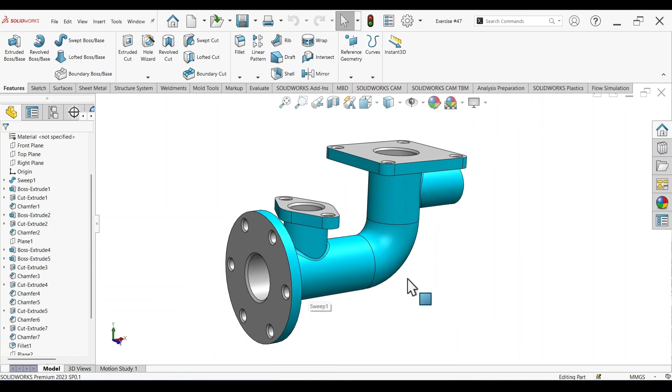Here we see the schematic drawing for exercise number 47. All dimensions are in millimeters. If we zoom in closely, we see that the unit system is set to millimeters, grams, and seconds. So that is the unit system that we're going to be using.

We have the isometric view, the trimetric view, the top view, the left view, the side view, and the section view. This section view was taken along this horizontal line. Additionally, we also have detail views showcasing the mounting holes for this circular flange, and the top square flange, and with all the dimensions given for easy implementation within SolidWorks.

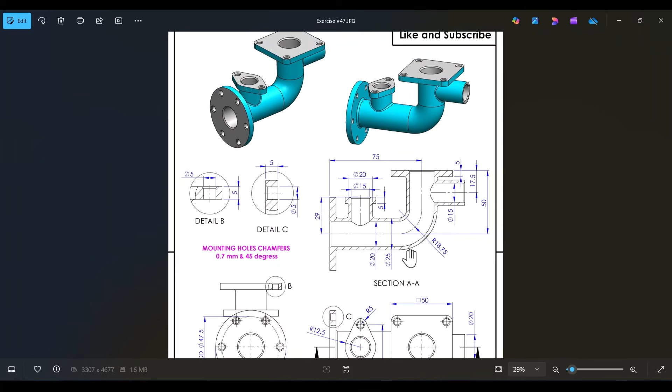It's always a good idea before we actually start the modeling process to stop and think through very carefully how we're going to model this within SolidWorks. If you've watched my videos long enough, you'll notice that I follow a feature-driven approach. What I do is look at the main features for the component, and based off of the physical features, I then think about what sort of tools I'm going to be using.

If you look closely here, we see that we have three flanges. We have this leftmost flange that is circular in nature. We have the top flange that can basically be created using a square, drawing a square on a 2D plane. And we have this oval flange, but we're going to call this the intermediate flange because it lies midway between the two large flanges that we have here.

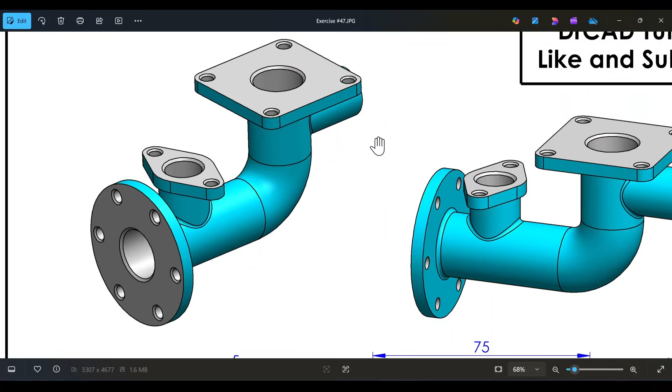So I guess the first step, if we're going to solve this within SolidWorks, is to work on creating this circular flange. For that, we're going to have to select the front plane and then sketch out a circle using the dimensions shown here. And then use the extrude boss base tool to create the thickness.

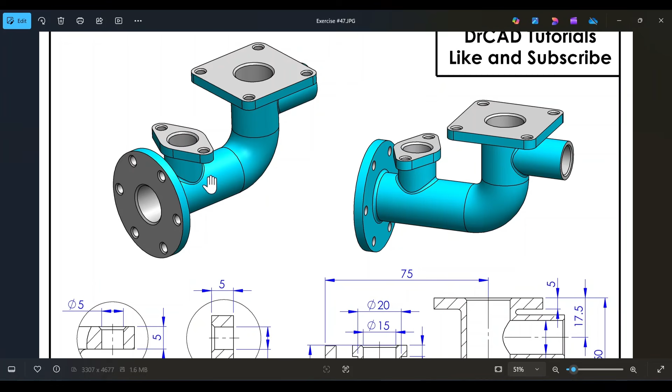After that, we're going to move on to creating the elbow SolidWorks component. What we're going to do is sketch out an annular profile, a pipe section, and then use the swept boss base tool to create the elbow, following a predetermined path. In this case, the hidden line shows the elbow path, and the elbow has a radius of 18.75 millimeters.

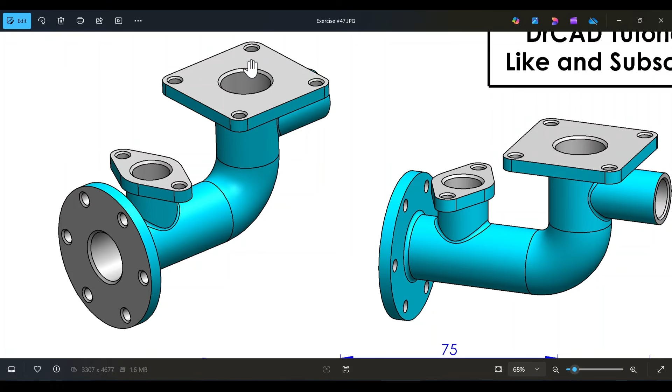After that, we're going to work on creating the top flange using the center rectangle tool and then setting the relation between two sides of this rectangle as equal, creating a perfect square. And then we're going to use the extrude tool to create a thickness.

After that, we're going to work on creating the intermediate flange. If we look at the top view, we see that we have a 2D sketch for the intermediate flange. Using the circle tool, we're going to create this 2D sketch, and then use the extrude tool again to create the connection between the elbow and the intermediate flange.

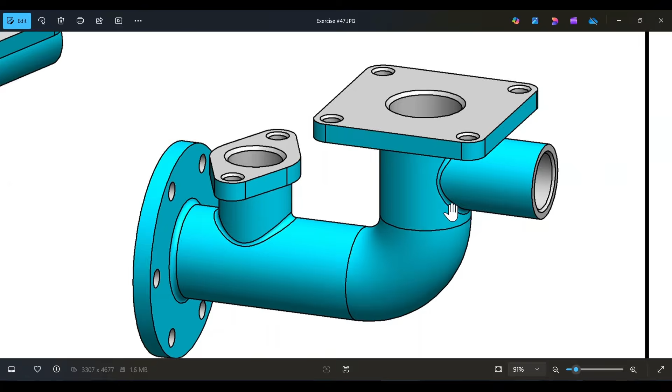Finally, if we look at the trimetric view, we see that there's a section that is basically protruding from the top of the elbow. So we're going to have to create a new drawing plane. The drawing plane in this case needs to be at a certain distance from a relative plane. After that, we're going to use the extrude tool to extrude it all the way to the surface, setting the end condition to up to surface.

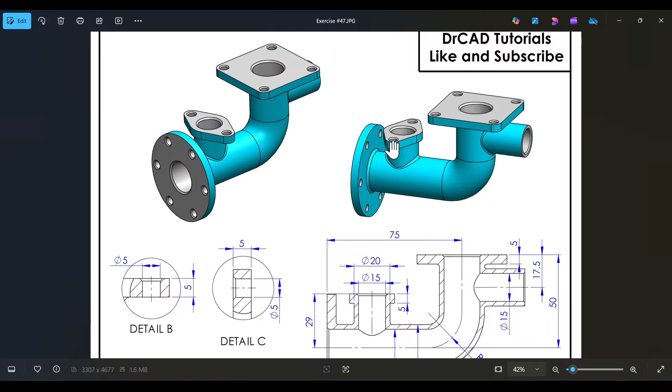Finally, we're going to use any of the fillet tools or chamfer tools to create or add the final touches for the components, and that's pretty much it. After that, we're going to assign a material; in this case, the material is alloy steel. Then finally, when everything's done, we're going to determine the mass of this part in grams. That pretty much sums up what we're going to do in this exercise.

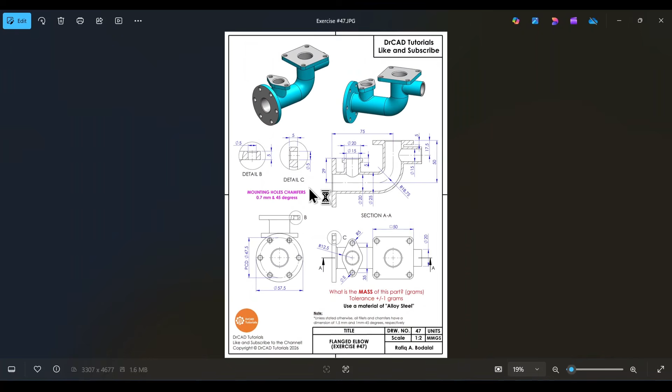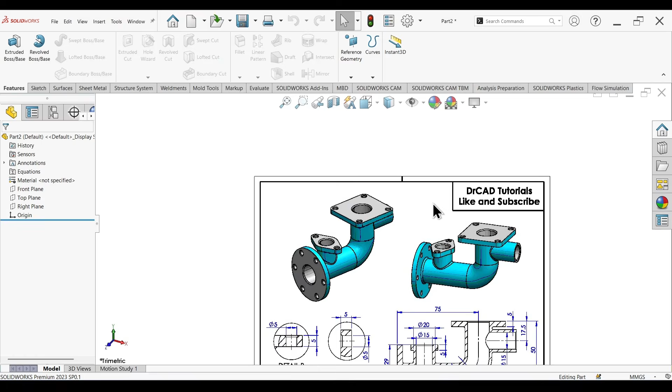Okay, so let's start by creating a new SolidWorks part. As always, let's set the background to clean white, and let's copy exercise number 47 into SolidWorks. Let's go ahead and make this smaller.

As I said previously, the first step would be for me to create this leftmost flange, the circular flange. So to start, let's select the front plane, sketch, drag this to the side, activate the circle tool, and from the origin, let's draw a circle.

Now let's activate the Smart Dimension tool, and looking at the side view, we see that the left flange has a diameter of 57.5 millimeters. So the diameter of this circle needs to be 57.5 millimeters.

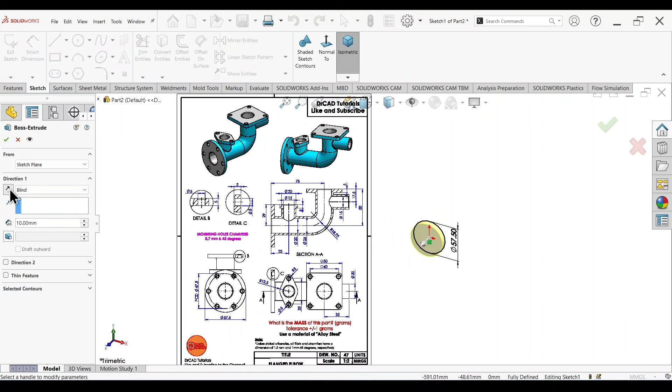All right, now press the S key, select Extrude Boss Base. We're going to reverse the extrusion direction, and we're going to set the extrusion thickness to 5 millimeters.

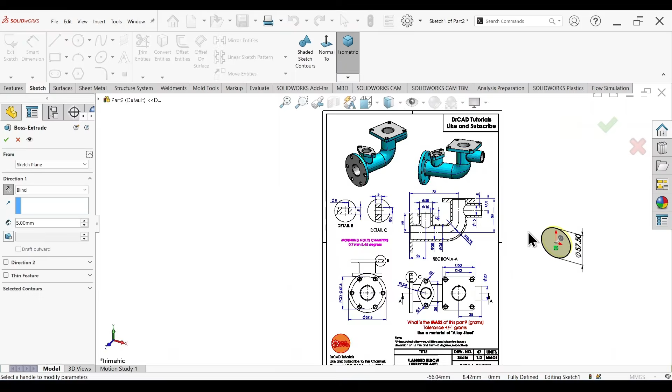How do I know that the extrusion thickness needs to be 5? Because if we look at the detail view here showcasing the mounting hole for the left flange, we see detail C has a thickness of 5 millimeters, and this thickness corresponds with the thickness of the flange. And then select OK. Now what we need to do is select this face, sketch, activate the circle tool again.

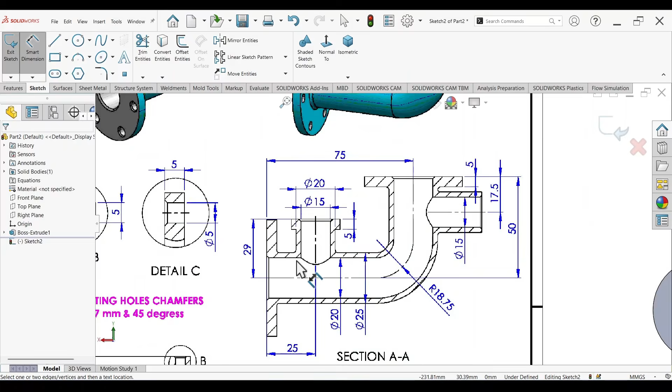Draw 2 concentric circles starting from the origin, 1 and 2. These 2 concentric circles need to be the annular section for the elbow section, or the pipe section, for this component. We see that the outer diameter needs to be 25 millimeters and the inner diameter is 20 millimeters. So the diameter of this circle is 25 and the diameter of this circle is 20 millimeters.

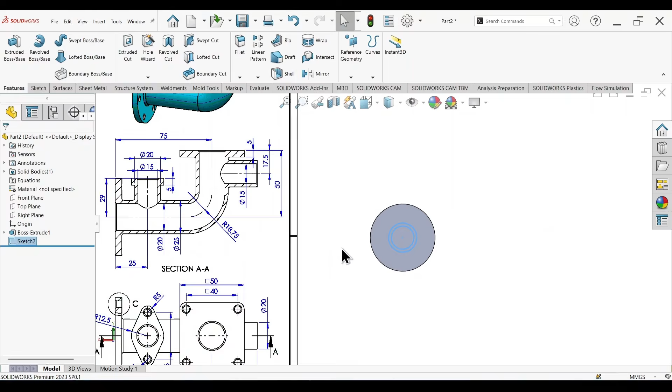So now that we have the 2D sketch, let's exit the sketch. What we need to do now, before we use the Swept Boss Base tool to create the elbow section, is sketch out the path, the extrusion path, for the piping section.

To do that, we need to select the right plane, sketch, and then select the line tool. Starting from this point right here, let's draw a horizontal line, and then a vertical line to finish it off.

Activate the Smart Dimension tool, and we can see here that the horizontal distance or the horizontal component for the line needs to have a distance of 75 millimeters. So this needs to be 75.

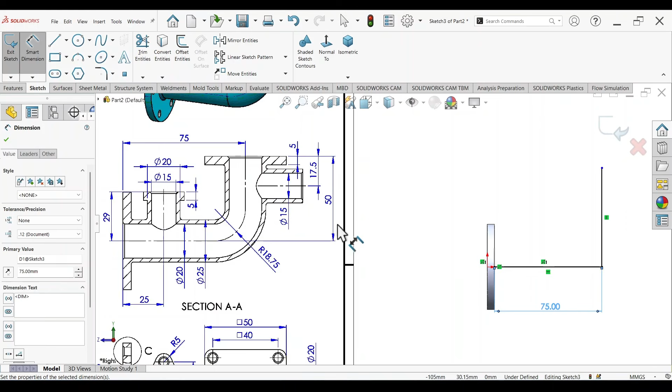Whereas the vertical component has an overall height of 50 millimeters, but please take into account that we have a flange here at the top, and the piping section doesn't go all the way to the flange. It doesn't go through to the flange, but we need to stop at this surface right here. So the distance needs to be 50 minus 5, which is 45 millimeters. So this edge needs to be 45 millimeters.

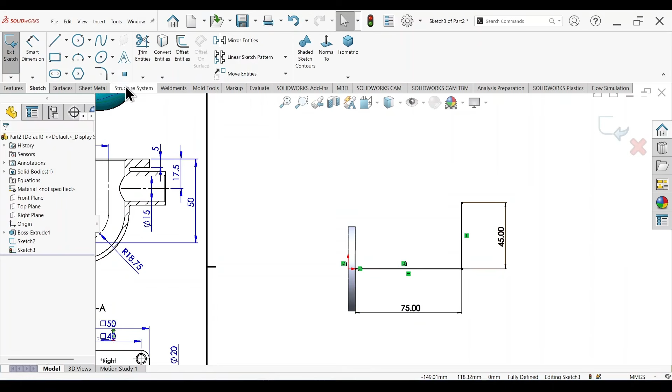Now select the fillet tool, and here we're going to define the elbow radius. In this case, it's 18.75 millimeters. And then click OK.

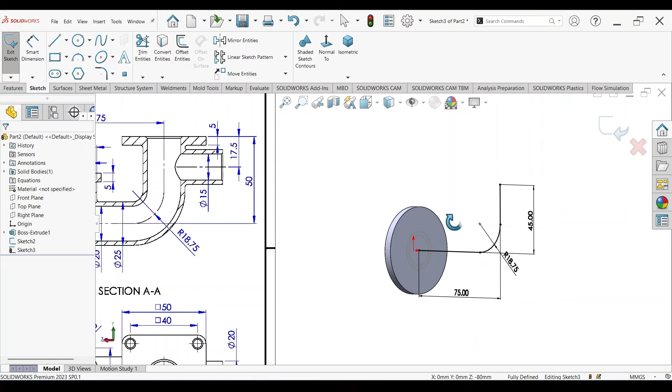Okay, so now we sketched out the extrusion path for the angular section. Exit sketch, go to features, select Swept Boss Base, and it automatically selected the last sketch we created for the sweep path. Now we just need to select these 2D sketches that we're going to extrude.

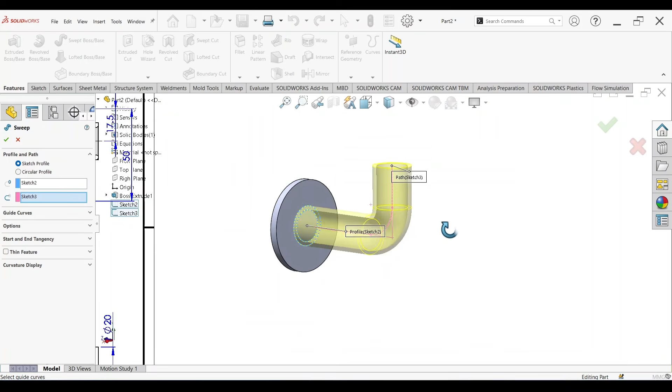So here, just select Sketch 2. We see that we have a preview for the extrusion process. Go ahead and select OK.

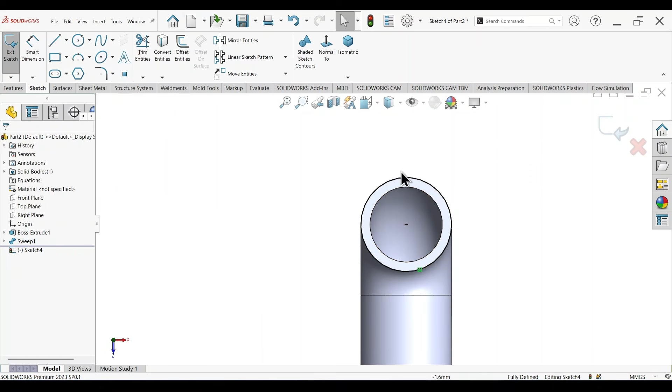All right, now we're going to work on creating this top flange, this top square flange. So select this top face, sketch, select Convert Entities, and that will wake up the center point for the circle. Activate the Center Rectangle tool, and from this point, draw a rectangle.

Click on this line while holding Control. Click on this line as well, and set the relation as equal, converting this rectangle into a perfect square.

Activate the Smart Dimension tool, and if we look at the top view for this top flange, we see that we have a dimension of 50 millimeters, and this symbol here says that it's a square. So for both sides of this rectangle, it needs to be 50 millimeters.

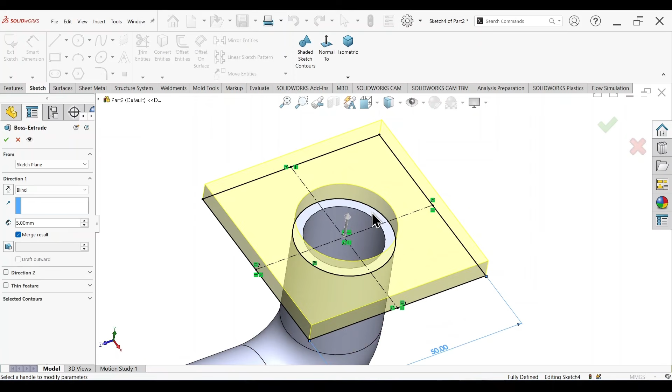All right, the sketch is now fully defined. Press the S key, select Extrude Boss Base. We're going to extrude this, adding this section right here. Let me go back to normal view and delete this line. Press the S key, Extrude Boss Base again - this is much better now. We'll set the extrusion thickness to 5 millimeters and select OK.

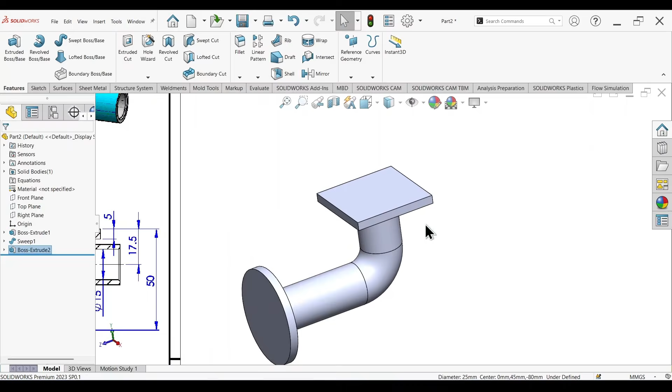And that creates the top flange. But of course, the edges for this top flange are rounded out - you can see here these edges have a fillet. How are we going to determine the dimension of this fillet?

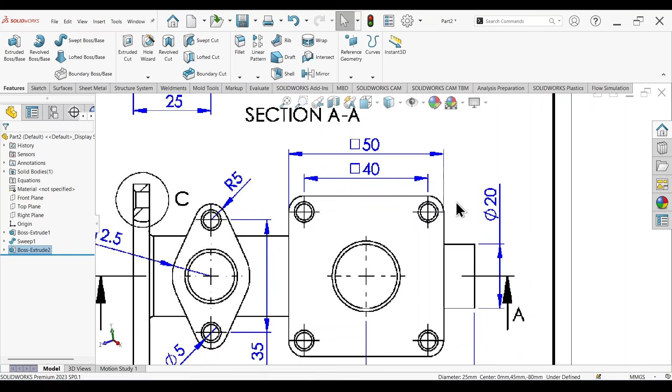If we look closely, the overall length of this edge is 50 millimeters, and the distance between these two mounting holes is 40. So 50 minus 40 is 10, divided by 2 gives the radius of curvature for this fillet - 5 millimeters. So we simply assign a fillet radius of 5 millimeters and select these 4 edges: 1, 2, 3, and 4.

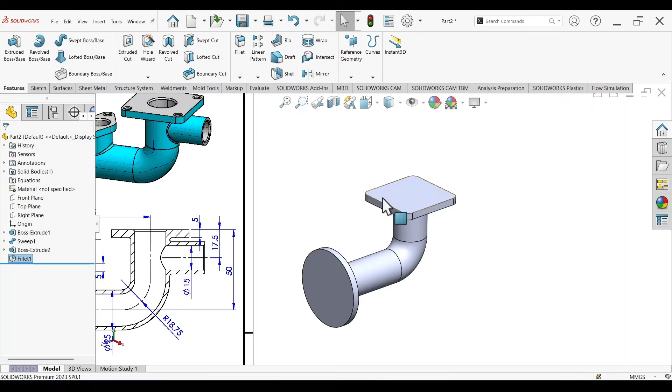Wonderful. Now we can see that the two flanges, the top flange and left flange, are closed off. We need to draw 2 circles and then extrude cut to create the opening, since the piping section is open on both ends. Let's start with this left flange - select this surface, sketch, activate the circle tool, and from the origin, draw a circle.

Activate the Smart Dimension tool - we see the internal diameter should be 20 millimeters, so this needs to be 20 millimeters. Press the S key, extrude cut, and set the end condition. Right click on your mouse, set the end condition as up to next, and that will automatically extrude the 2D sketch all the way to the inner surface of this flange, then click OK.

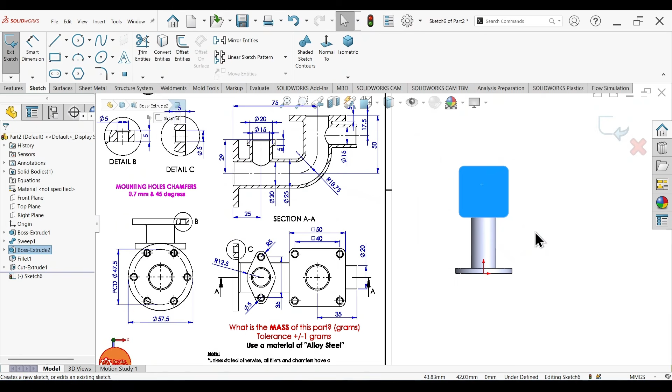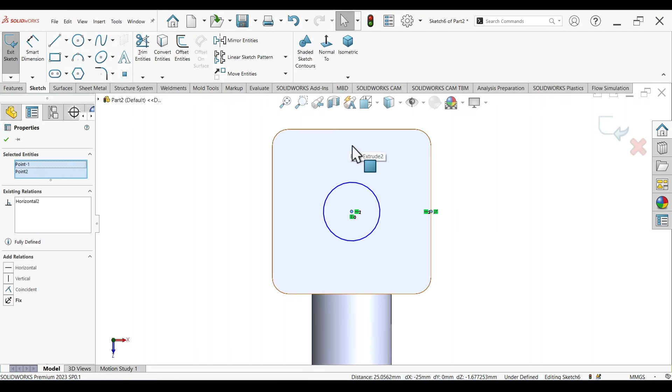We're going to perform the same process for this top flange. Select this top face, sketch, activate the circle tool, and draw a circle. Set the relation between the center of this circle and the origin as vertical by pressing V on your keyboard. Then set the relation between this point and the center of the circle as horizontal.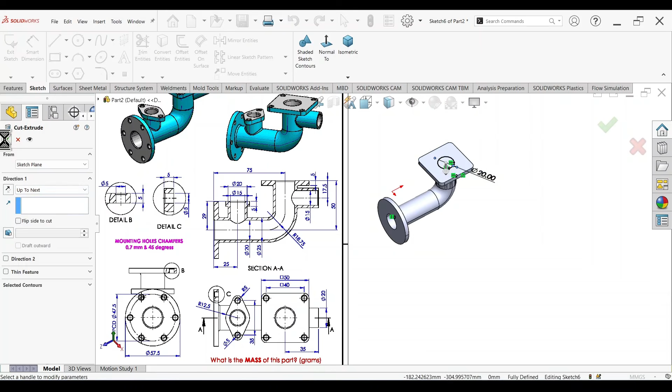That will directly position the center of the circle in the dead center of this square. Now activate the Smart Dimension tool and assign a diameter of 20 millimeters - again, this is the inner diameter of the pipe. Press the S key, extrude cut - the end condition is already set to up to next. Press OK, and that opens up the pipe on both ends - you have the top end and the left end. So far, so good.

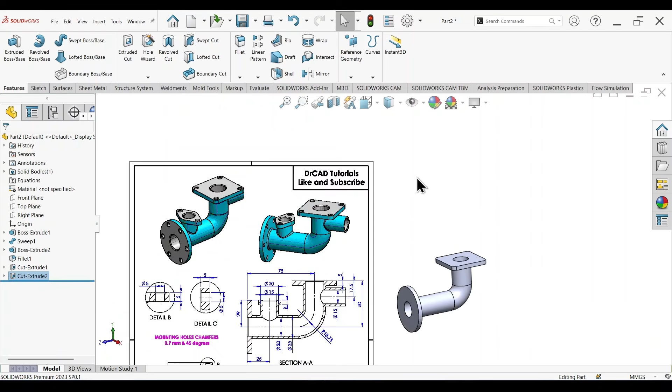Now we need to work on creating this protruding circular pipe section that's basically protruding from the top section of the elbow. So we need to create a new drawing plane, create a circular profile, and then extrude all the way to the curved surface. For reference geometry, select plane.

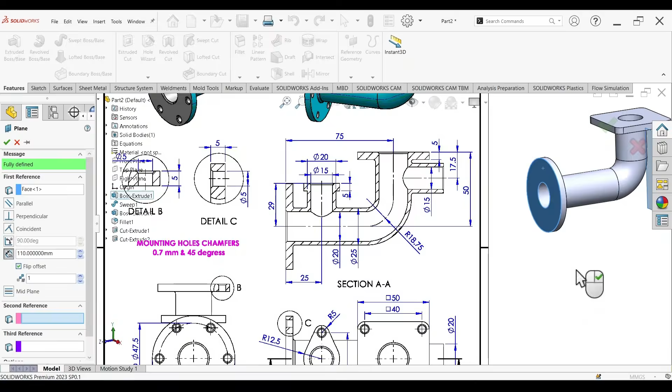If we look at the standard drawing planes within SolidWorks, we're going to select the front plane, which automatically selects the surface right here. Reverse the direction, the offset direction, flip offset. How far away this drawing plane needs to be relative to this leftmost edge: we have an overall distance of 75 millimeters, plus 35 - the distance from this edge to the center of the circle is 35. So 75 plus 35 millimeters gives us the overall offset distance, which should be 110 millimeters.

Click OK. Now just right click on this drawing plane, sketch. Let's go ahead and enlarge this right here.

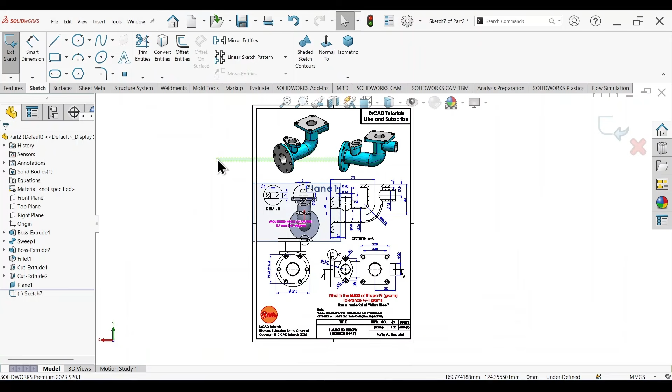Normal again, drag this to the side, drag the sketch. So what we need to do now is activate the circle tool, draw a circle right here, and set the relation between the center of this circle and the origin as vertical by pressing V on your keyboard.

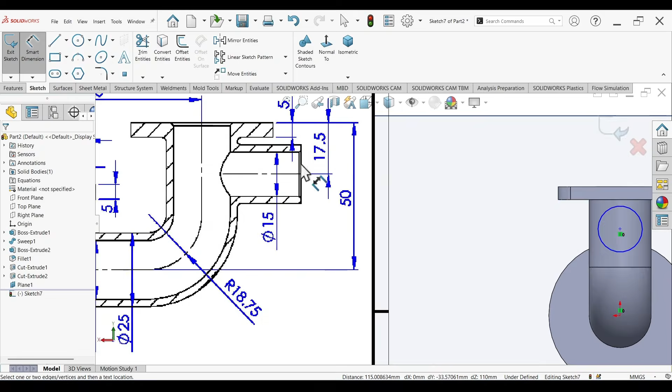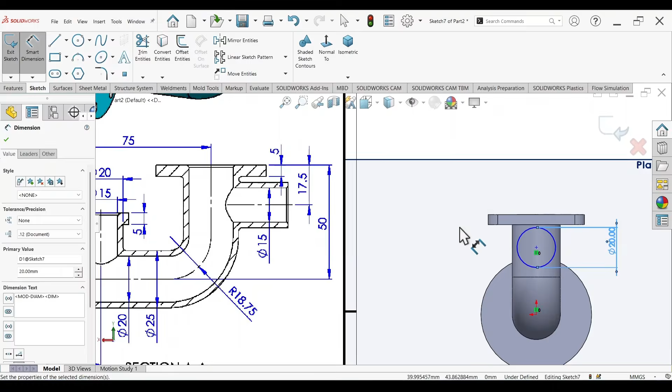Activate the Smart Dimension tool. We see that the outside diameter of this section should be 20 millimeters. We're only going to create the outside profile, so click and set it to 20. That's the outside diameter. The distance between the center of the circle and the top flange right here should be 17.5.

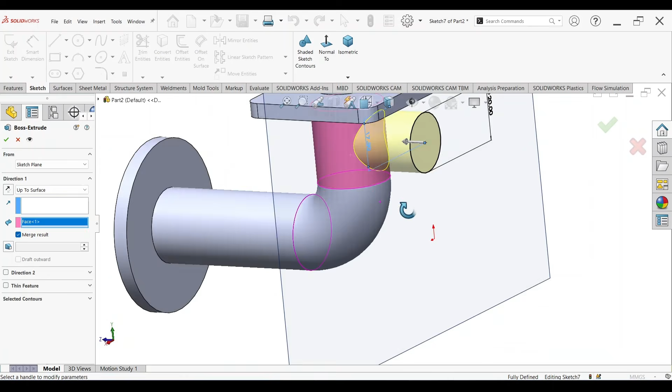Now the sketch is fully defined. Press S on your keyboard, extrude boss base, right click on your mouse, and set the end condition as up to surface - click on this surface right here, then click OK. Right click on the plane, hide, and that creates the protruding cylinder section.

But of course it's a pipe section, so we need to open up this cylinder. Click on this surface, sketch, activate the circle tool, and from the center of the circle draw another circle. Activate the Smart Dimension tool. The inner diameter right here should be 15 millimeters, so this needs to be 15.

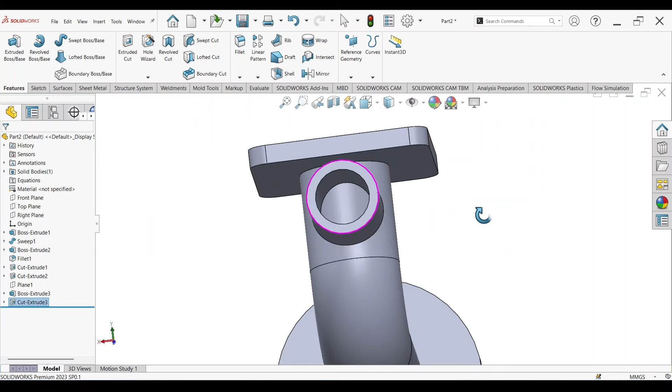Press the S key, extrude cut, right click up to next and click OK. That creates the opening for this pipe section right here.

So what else do we have? So far the final solid is starting to take form. We have one more flange we need to create - that is the intermediate flange right here, the oval shaped flange.

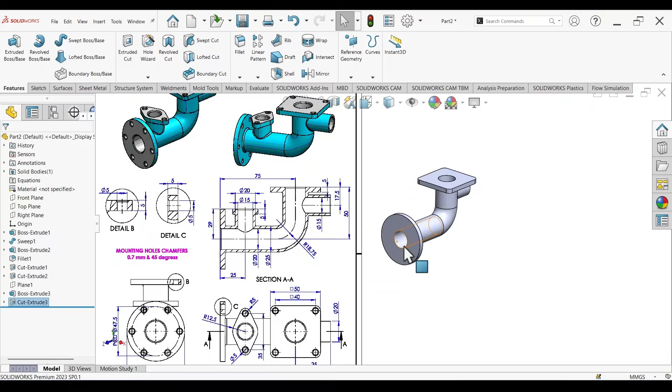So we need to create a new drawing plane, relative to the top plane. Go to reference geometry, plane, and select the top plane, which by the way divides the pipe section right here in two. The new drawing plane needs to be 29 millimeters away from this center line, so assign an offset distance of 29 millimeters, then click OK.

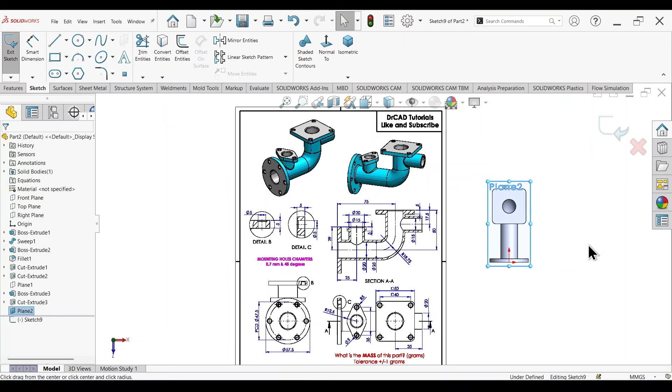Right click on the new drawing plane, sketch, activate the circle tool. What we're going to do very simply is sketch out the 2D sketch for this oval flange right here.

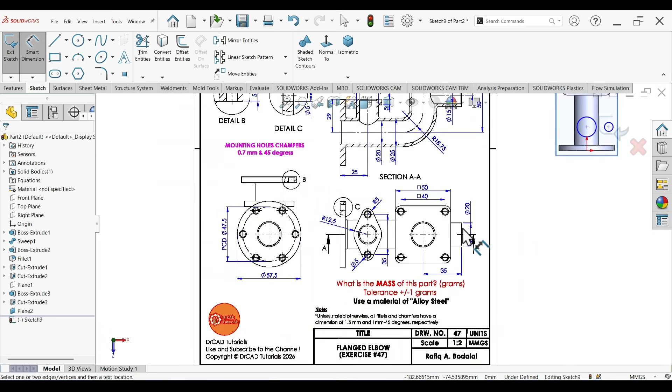So starting from this point, let's draw a larger circle. In addition, we're going to draw another circle here to the side. Activate the circle tool - the larger circle should have a radius of 12.5 millimeters, which is a diameter of 25 millimeters, so this needs to be 25.

The smaller circle right here, if you look closely, has a radius of 5 millimeters, so here we need to assign a diameter of 10 millimeters. The distance between the two circles overall is 35, so it should be 35 divided by 2 - the distance between this point and this point is 17.5.

Now we just need to activate the line tool and connect these two circles using a tangent line. Line tool again, connect with these two circles. Set the relation between this point and the origin as vertical by pressing V on your keyboard.

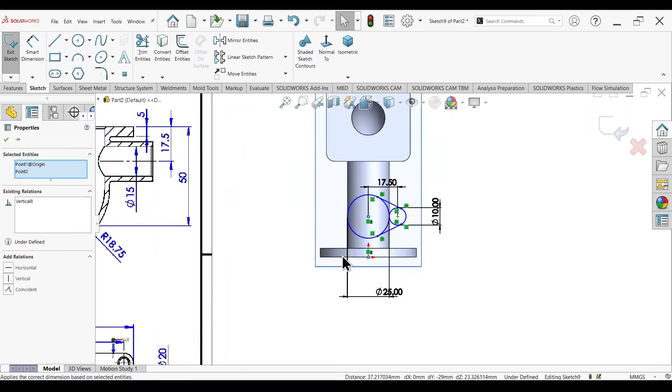We can see here that the distance between the leftmost edge of the left flange and the center of this circle should be 25 millimeters. So activate the Smart Dimension tool, and the distance between this point and this edge should be 25 millimeters.

Set the relation between these two points as horizontal, sorry. Now the sketch is fully defined. Now, of course, we need to mirror this to the other side.

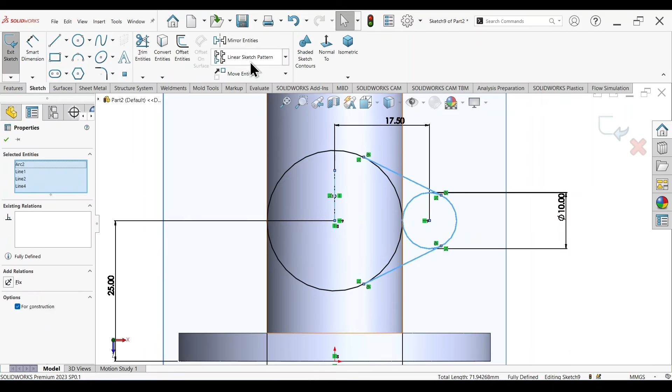Let's activate the center line tool and draw a center line. Let's select these two entities, these two tangent lines, in addition to this arc and this center line, and then select mirror entities. That will automatically mirror the entities you created to the other side. Activate the trim tool and delete any extra entities that we don't need.

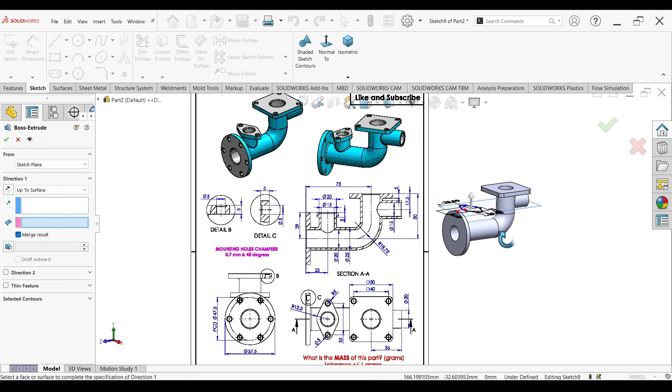That leaves behind the 2D sketch. Now press the S key, extrude boss base, and we set the end condition as up to surface.

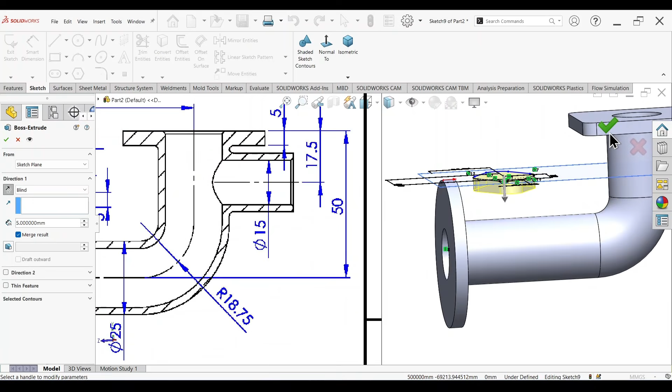So now the question is, we need to reverse the extrusion direction all the way to the bottom because, of course, we created this drawing plane at a distance of 29 millimeters. Now we need to assign extrusion a depth of 5 millimeters right here. Then click OK. Right click on the drawing plane, hide.

Now we need to connect this intermediate flange all the way to this curved surface. Select this bottom surface, sketch, activate the circle tool, and starting from this center point, draw a circle. Activate the Smart Dimension tool. Looking closely, the outside diameter for this pipe section should be 20 millimeters, so this needs to be 20 millimeters.

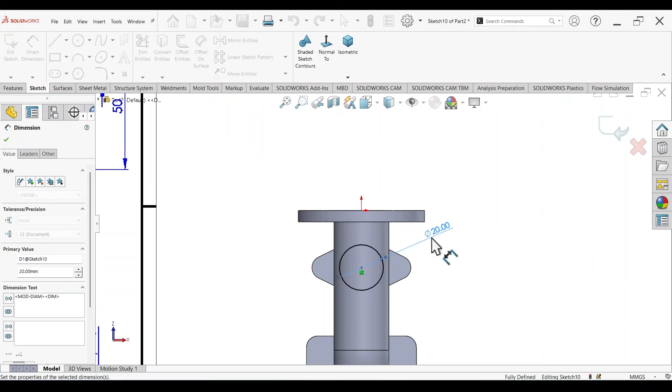Press the S key, extrude boss base, set the end condition as up to surface, and select this surface right here. Then click OK.

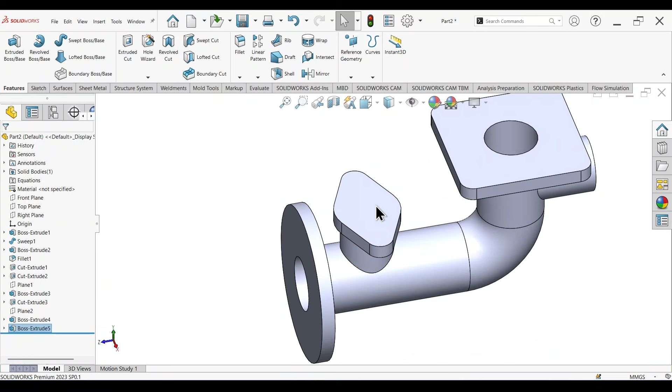Are we done yet? No, we're not done yet. We have to open up this intermediate flange. Select this top face, sketch, activate the circle tool, and starting from the dead center of this larger circle, draw a circle. Activate the Smart Dimension tool. Looking at the section view, the opening here should be 15 millimeters, so this needs to have a diameter of 15 millimeters.

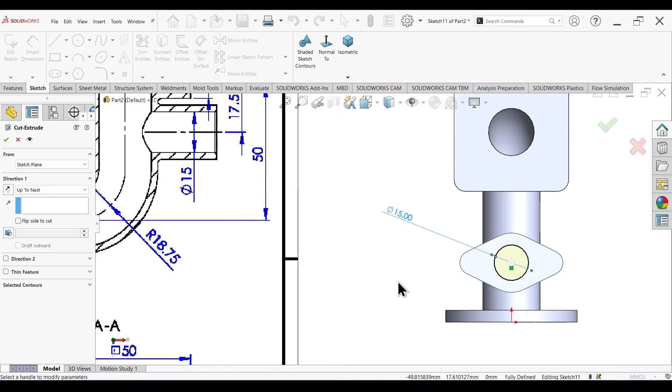Press the S key, extrude cut. Right click on your mouse - the end condition is already set to up to next - and then click OK.

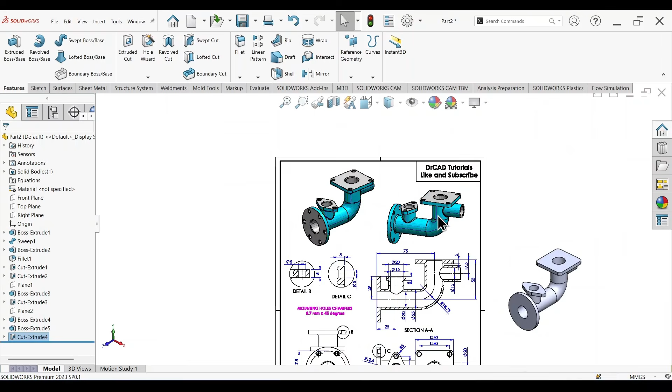So now the main body for this exercise is complete, but there are some details we need to add. We have the mounting holes for the leftmost flange, the intermediate flange, and the square flange. So now we're basically going to be creating the mounting holes.

Let's work on creating the mounting holes for this flange here. Select the surface, sketch, activate the circle tool, and starting from this point, draw a circle. Convert the circle to construction geometry by pressing Q.

Activate the Smart Dimension tool. This circle will serve as a pitch circle, helping us determine the locations of the mounting holes. Looking closely at the side view, the pitch circle should have a diameter of 47.5 millimeters, so this needs to be 47.5 millimeters.

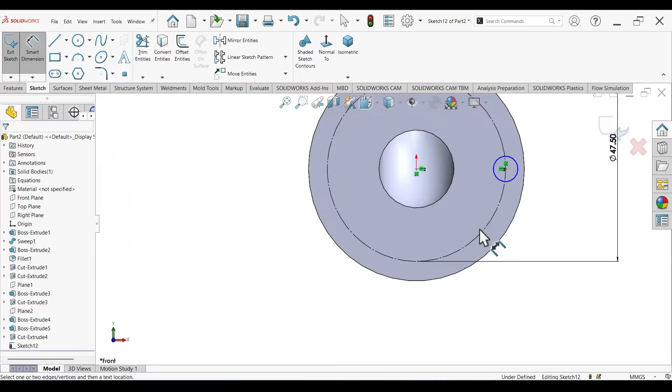Now activate the circle tool again, and starting from this point, draw a circle. Activate the Smart Dimension tool, and the mounting hole, if we look at detail number C, should have a diameter of 5 millimeters. So this needs to be 5 millimeters.

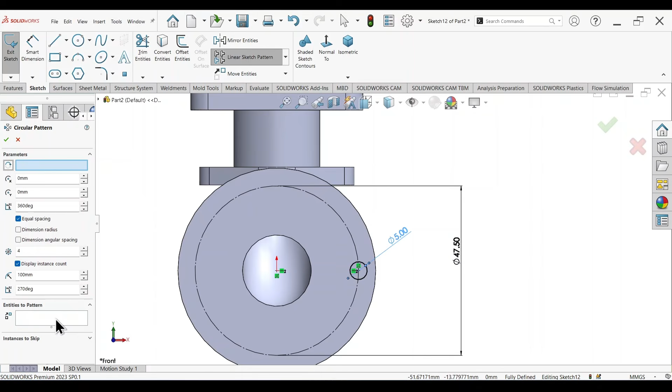Now go to Linear Sketch Pattern, click on the drop-down menu, and select Circular Sketch Pattern. For the entities to pattern, click on the circle, set the number of copies. Looking closely, we have 6 in total, so we set this to 6. Then click OK.

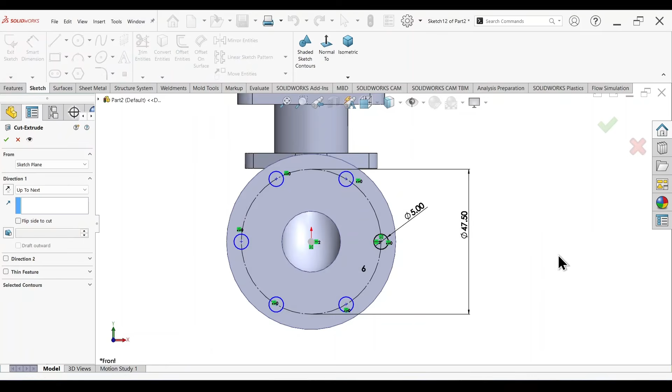Now we have 6 copies of these circular profiles representing the mounting holes. Press the S key, extrude cut. It's already set to up to next, then click OK. That creates the mounting hole for the leftmost flange.

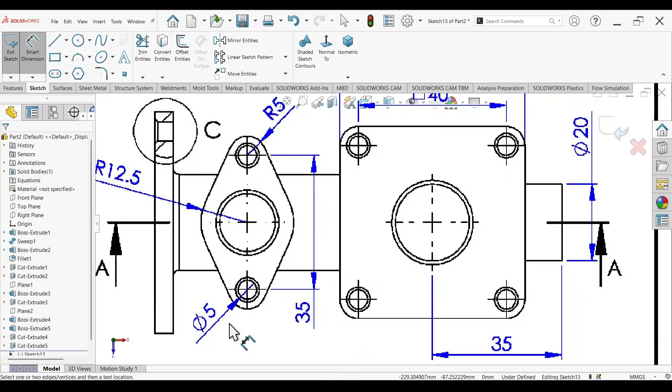Let's go ahead and create the mounting hole for the intermediate flange. Select this surface, sketch, activate the circle tool. Starting from this point right here, draw the circle, activate the Smart Dimension tool. We see here that the diameter for the hole should be 5 millimeters, so this should be 5 millimeters.

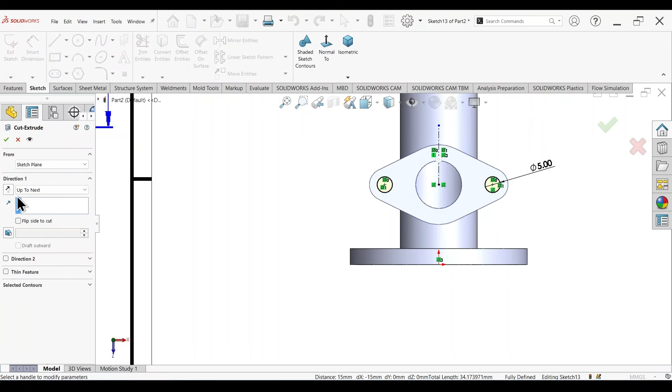Let's draw a center line, starting from this hole, draw a vertical center line. Use mirror entities to mirror this entity about this vertical line. Click OK. S key, extrude cut, it's already set to up to next. Click OK. That creates the mounting hole for the intermediate flange.

Now we're going to create the mounting holes for this top flange right here. Sketch, activate circle tool. Start from the center, this point right here. Draw 1, 2, 3, and 4.

If we look at the top view, we see that the distance between the two circles should be 40 millimeters. By default, it's already set to 40. If you look very closely, the distance between this point and this point is 40. So now we just need to assign the diameter of these mounting holes, which is 5 millimeters.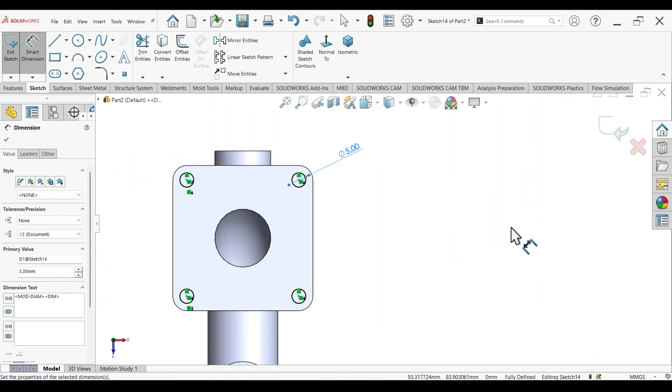Before that, to save time, let's select all of these circles and set the relation as equal. Activate the circle tool, assign the dimension of only one of these holes as 5 millimeters, and that will automatically change the rest of the diameters for the rest of the circles. Press the S key, extrude cut. It's already set to up to next. Click OK.

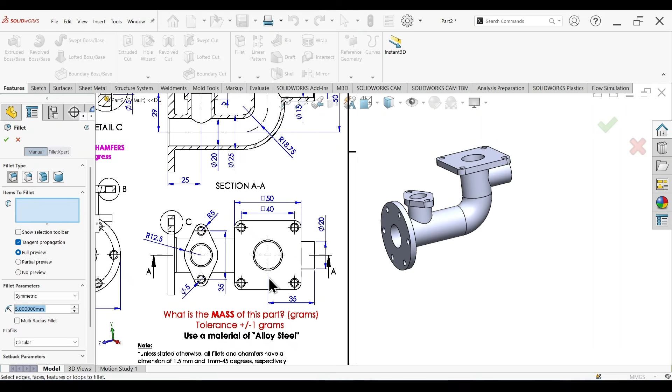That basically completes the modeling process. Now we just have some minor details we need to create, like certain fillets we need to fill out. Let's select the fillet radius in the fillet tool. If we look closely, there are certain fillets that are not assigned. For example, the fillet between the left flange and the elbow should be, if we check the comment section in the notes, it says unless stated otherwise, all fillets and chamfers have a dimension of 1.5 millimeters and 1 millimeter 45 degrees respectively. So the fillet radius needs to be 1.5 millimeters.

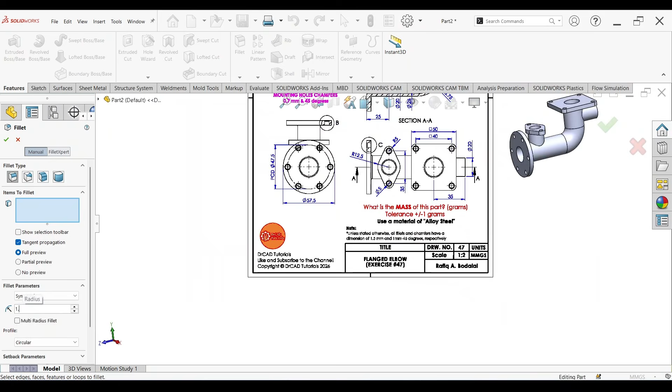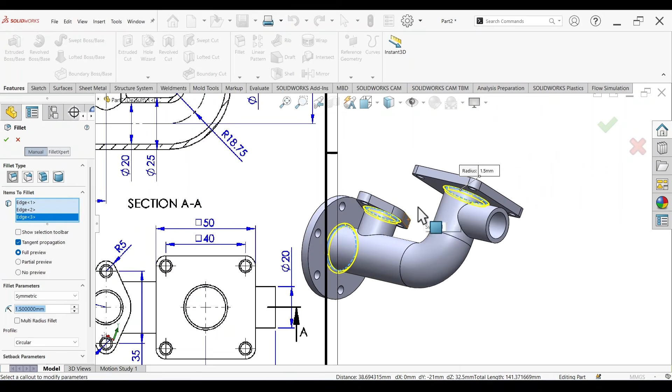So how many fillets do we need? We actually have a fillet for this edge, and the edge right here at the top. If we look closely at the section view, there's actually a curve here. Let's select these edges: 1, 2, and 3 - these are 3 fillets. Actually, we need to delete edge 2; we don't have a fillet there. Clear selection, let's start from the beginning. You have this edge, this edge, and this bottom edge right here.

Also, if we look closely, there's a fillet between the protruding piping section and the top of the elbow. Let's assign a fillet radius for this edge, then click OK. That completes the filleting process using the fillets.

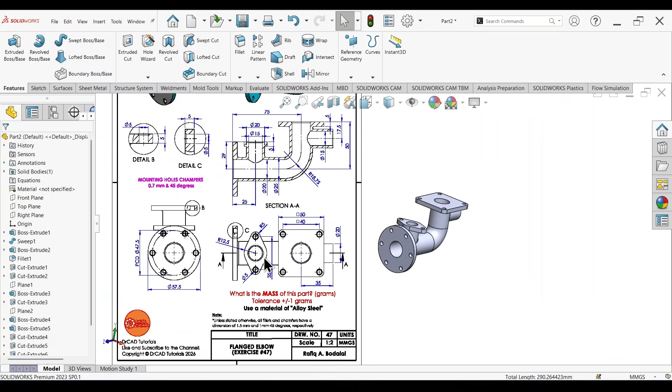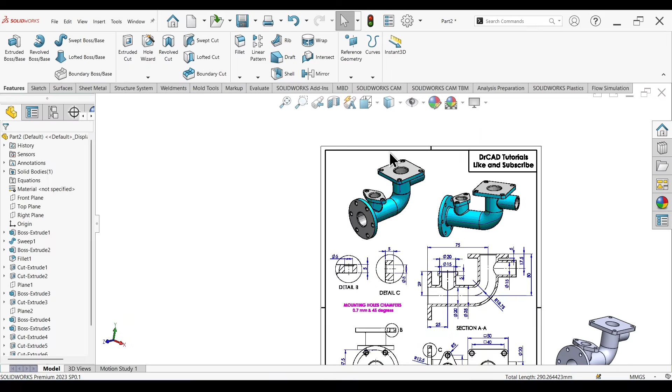Now we just have one more thing to do with our chamfers. We see that the chamfers have a dimension of 1 millimeter by 45, so we need to use the distance angle convention. For detail B and C, the fillet holes for the leftmost flange, and for the top flange here, have a chamfer of 0.7 by 45 degrees. Let's assign the chamfers for the mounting holes. Select chamfer, set this chamfer dimension as 0.7 millimeters, and select these edges for the mounting holes.

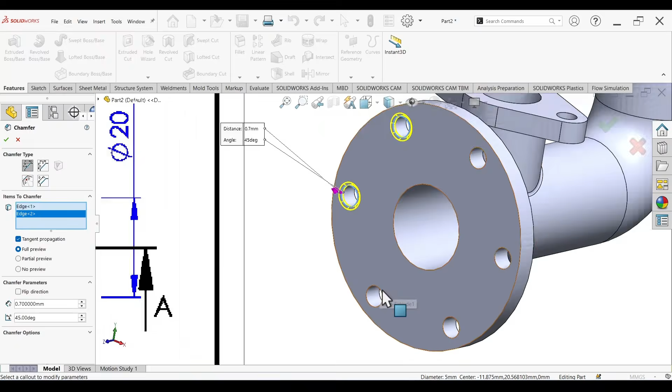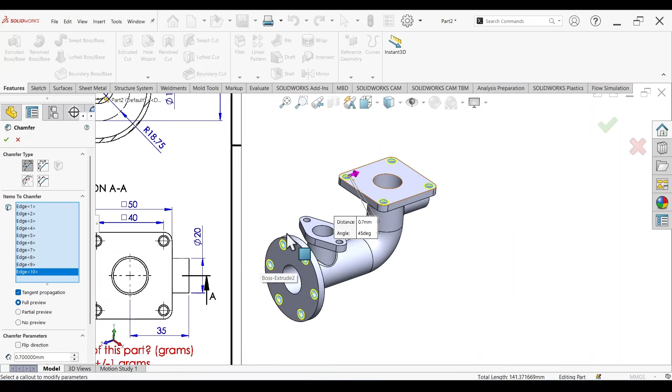And we have a chamfer here at the top for these top mounting holes as well. We also have a chamfer for these holes right here. For all mounting holes, the chamfers are 0.7 by 45 degrees. Click OK.

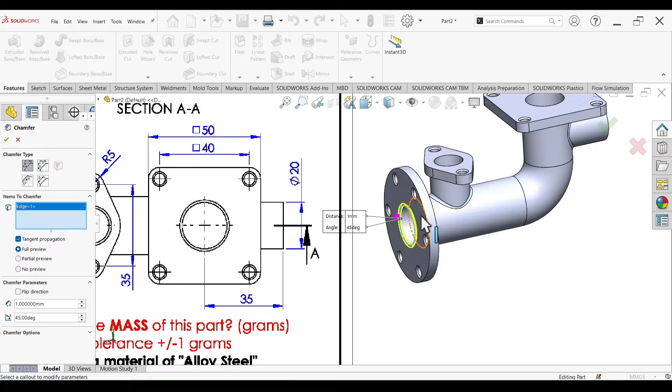Are we done yet? Are there any more chamfers we need to assign? Yes, we have a chamfer for this outer rim right here and the rim here as well at the top, and also the rims for this protruding cylinder. It's unassigned, so we need to assign a chamfer of 1 millimeter by 45. Select chamfer, assign a distance of 1 millimeter, and select this edge, this edge, this edge, and finally this edge. Then click OK. That completes the modeling process.

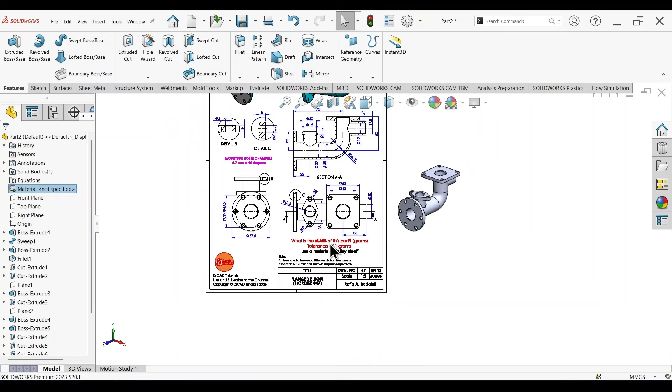Now we need to assign a material. Right click, edit material, apply a material of alloy steel, apply. Let's delete this image. Now for the moment of truth, we determine the mass of this part. Select evaluate, go to the evaluate tab, select mass properties, and your final answer is 363.16 grams. That is our final answer.